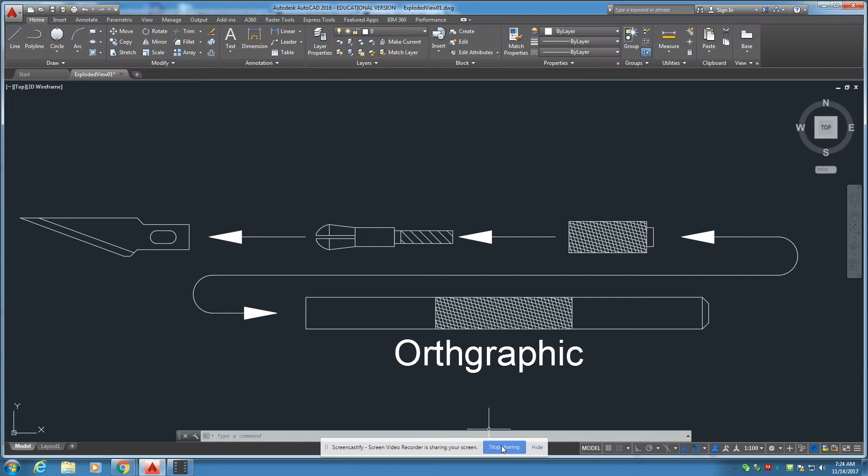Okay, part 7. We're going to be converting this curve right here with the arrowheads to an isometric. Now, if you remember in the last tutorial, we converted the arrowhead, but we need to put the curve in and the line. So might as well use what we have.

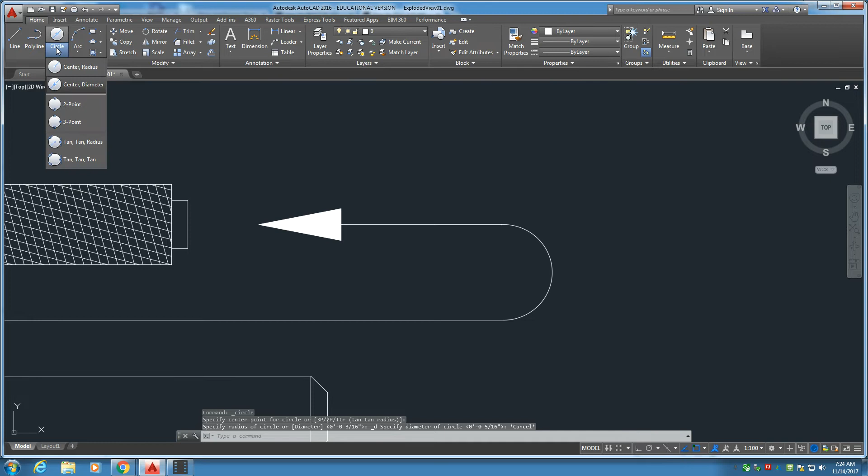Let's go ahead and actually use center diameter. Let's get the diameter of the circle off of this. Not working. Did I grab the wrong tool? Let's see. Center radius, there we go. That's why. It's all done live, folks, very little editing involved.

Let's bring this over here. Some of you might have guessed that this needs to be converted to an isometric before we can use it. We're good with that. I need to think about which direction this line goes because I'm going to want it to be facing this way.

Actually, let's go ahead and copy this. We're going to do both and we'll see which one we like better. Sometimes you just need to test it out. There's one at 330, there's one at 30.

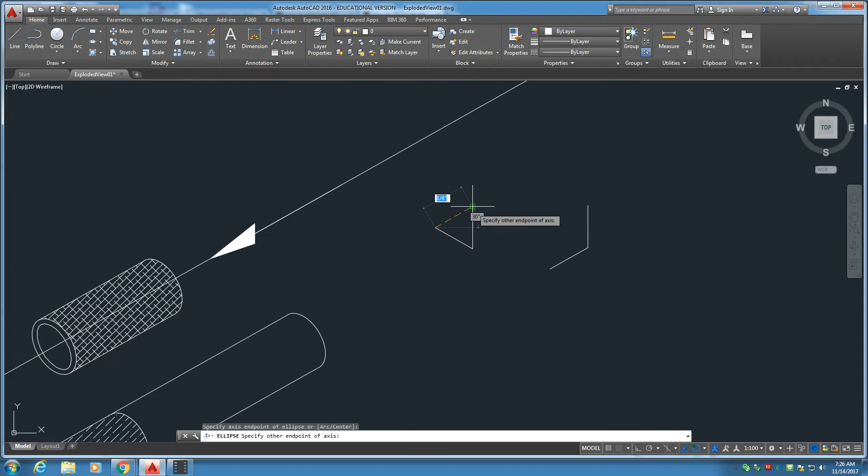And let's get our axis ends 1, 2, and 3. We're going to go 1, 2, and 3. So, being that I want to hook this way and go in this direction, you can obviously see that we need to use this one.

So let's go ahead and get rid of the guidelines and grab the move tool. Actually, let's copy it, we're going to need this for later on. Selection. Oh, you know what, I forgot, you can see the quadrant gets moved around because of the fact that it was converted.

So we need to put crosshairs on here. So construction line, we're going to grab it and turn on the ortho. Bring it perfectly straight across the screen this way, and then straight up and down vertically this way. This is going to mark the top and the bottom.

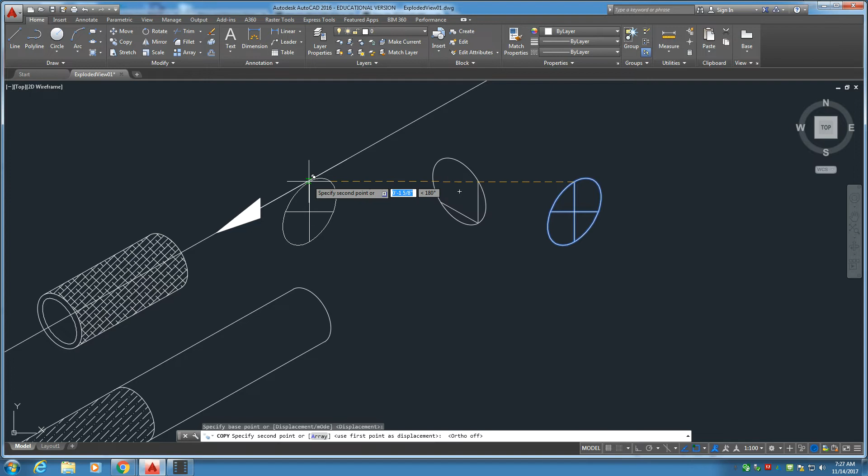Let's go ahead and trim off the exterior lines. Get rid of that, delete. Now let's go ahead, we're going to need this for later, so let's go ahead and copy this. Grab it from the top, turn the ortho off, and let's find the end of the arrow right there. Fantastic. Now we need to put a line going this way.

Whenever this happens, all you have to do is just get the regular line tool, use it as a temporary guide. What happens is it wants to roll around on the radius. This can easily be fixed. Just, oops, got to grab it from the line.

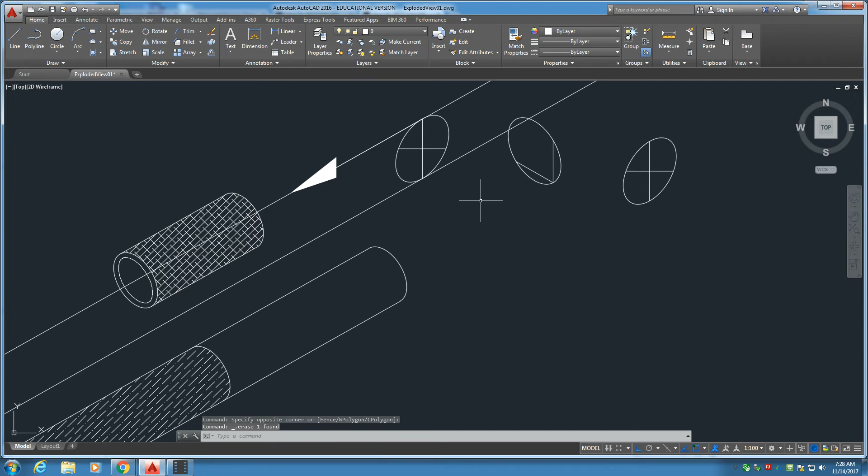There it is. All right, now we need to rotate this construction line also 30 degrees, that little temporary line. And now we need to put another one down here, and I believe it's the same one.

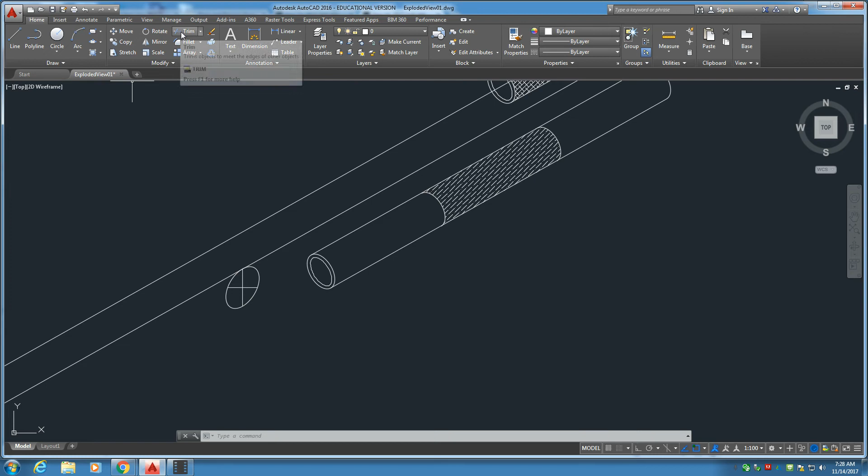Let's see, let's go ahead and copy this from the top. And yep, works perfectly. We'll put it right about there. It can be moved later, but for now we put it there. Let's go ahead and trim off the end here, trim off the end on here and here.

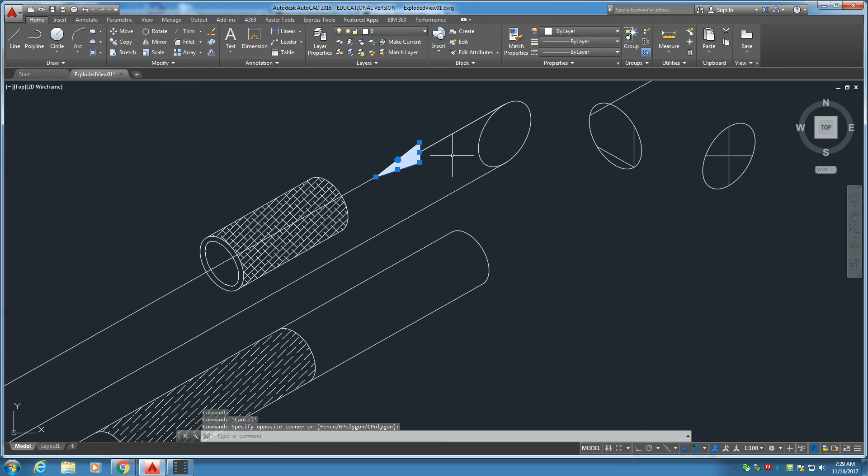And now we need to, let's get rid of the guidelines, over here and over here. Oh, let's put the arrow on while we're doing this. So let's take, we have an existing isometric and the line.

Just this, bring it down. Now this needs to go the opposite direction. And I'm having a bit of a brain freeze, I forgot how to flip this.

So let me do this. I'm going to pause so I can just get it down. Okay, so let me go ahead and get that out of the way. All right, we need to flip this in the opposite direction.

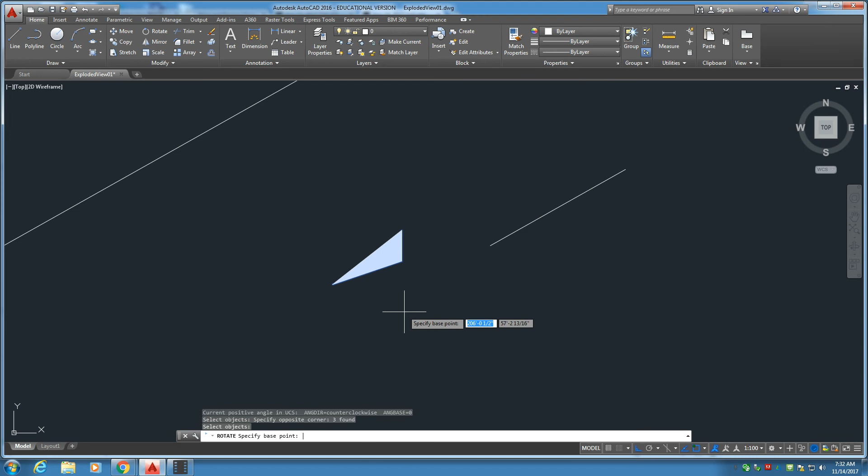So temporarily, we will take that line off. We need to do just the arrowhead. We're going to take the rotate tool, select it, grab it by the center, and flip it 180 degrees.

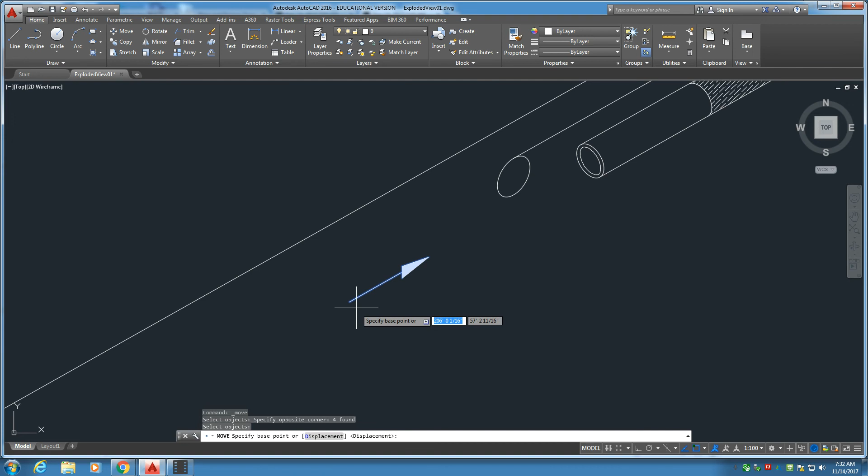Now we can take the line, drop it on the center right there, and we need to move it here. Looking for the quadrant here. Oh, silly me, there is no quadrant.

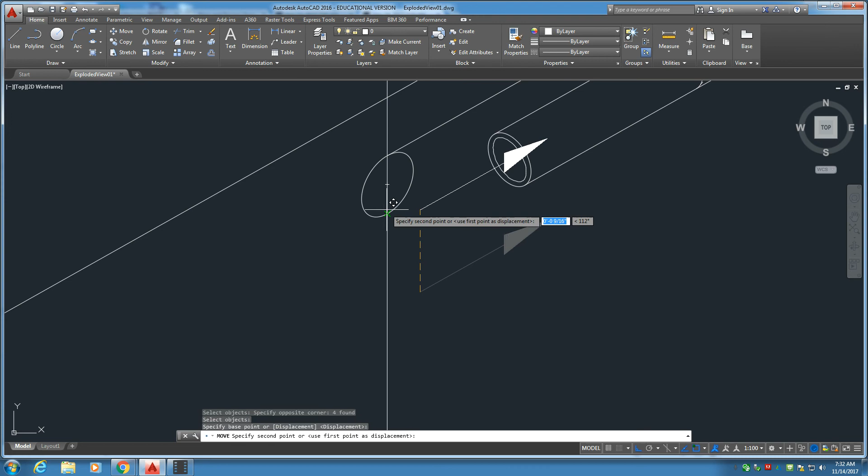Let's temporarily put a line in. And now we go off the center of the line. That's the true bottom of the isometric right there. All right, I like it.

We need to, as mentioned before, move this around a little bit. So let's go ahead and select this. I'm making sure I have every single line on it. Grab the move tool, put it right on the tip right there.

And looks like I left one little line out here. Let's go ahead and get the move tool, drop that on. I missed a little bit, but to save time for the video, I'll fix that later. And let's just move it a little bit more.

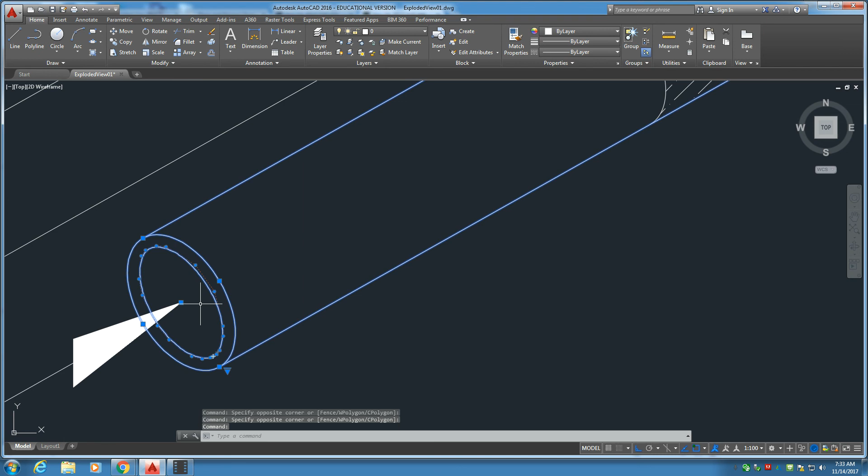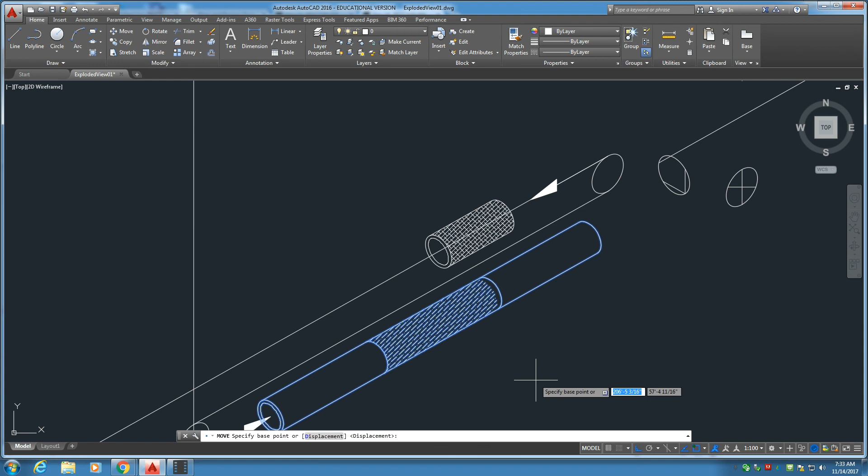Actually, yeah, we have to move it. Again, this is all done live with very little editing. Move tool, ortho off, and right there. Great.

Alrighty, let's see how much video is left here. I have just enough time to go back and fix this little piece right here. So, snaps are on the line. Perfect, save.

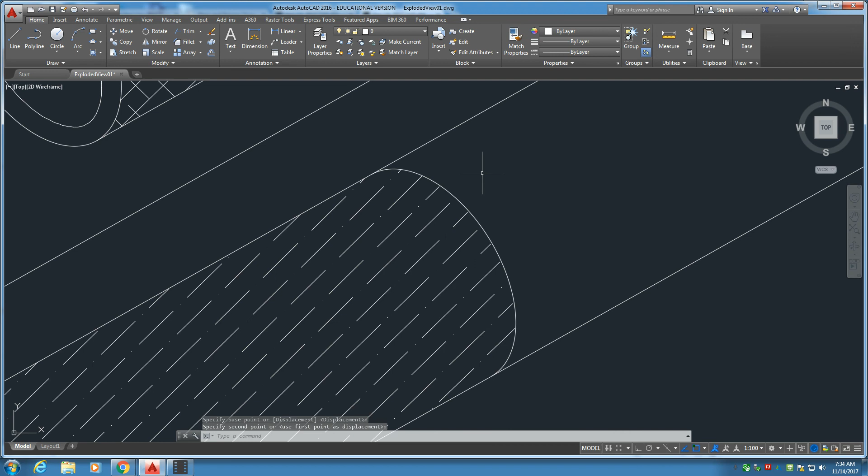All right, so actually get rid of this. Trim out these two pieces, the last step. And we have everything built for the curves. Looking good, all right, now we can stop.